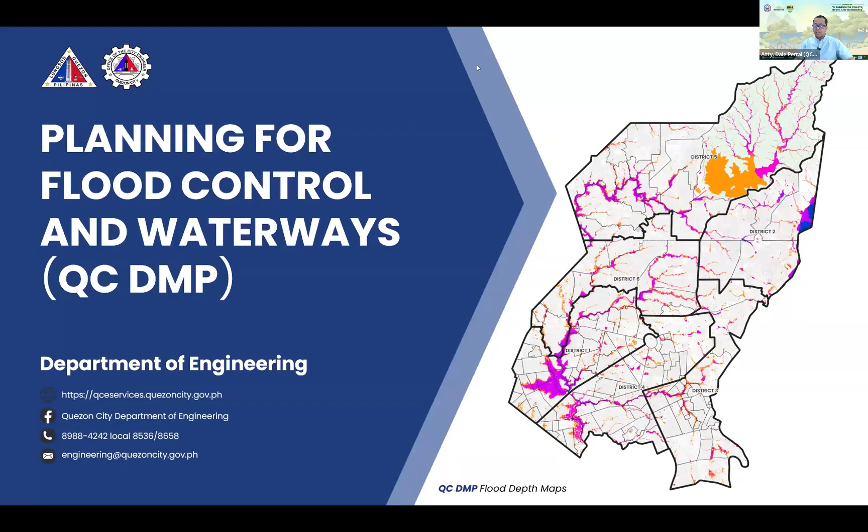So I'll be discussing planning for flood control and waterways, the Quezon City Drainage Master Plan. So the highlights of the presentation are as follows. Am I clear? Yes, sir.

So the highlights are as follows: the Quezon City Drainage Master Plan, the flood mitigation project, and our accomplishments since 2019.

So the Quezon City Drainage Master Plan has been developed through the joint efforts of several departments of the Quezon City government, not only the Department of Engineering, but also the QCDRRMO, the Disaster Risk Reduction Management Office, and of course, led by the Office of the City Administrator. Aside from the Quezon City government departments and offices, this initiative has been developed through the help of the UP Resilience Institute, or the NOAH Center.

It began in 2021 and was completed in 2023. While it was completed in 2023, this study is continuous, and we are trying to update our data currently.

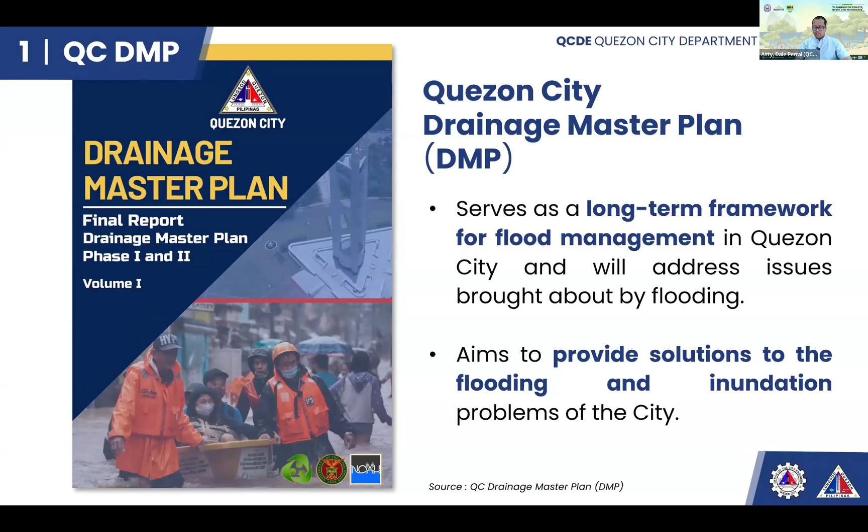So the Quezon City Drainage Master Plan serves as a long-term framework for flood management, and we hope to address the issues brought about by flooding. It's meant to provide solutions to the flooding and inundation problems of the city. Basically, it's not only about infrastructure and engineering; it also includes social preparation, disaster risk reduction management, and other aspects as well.

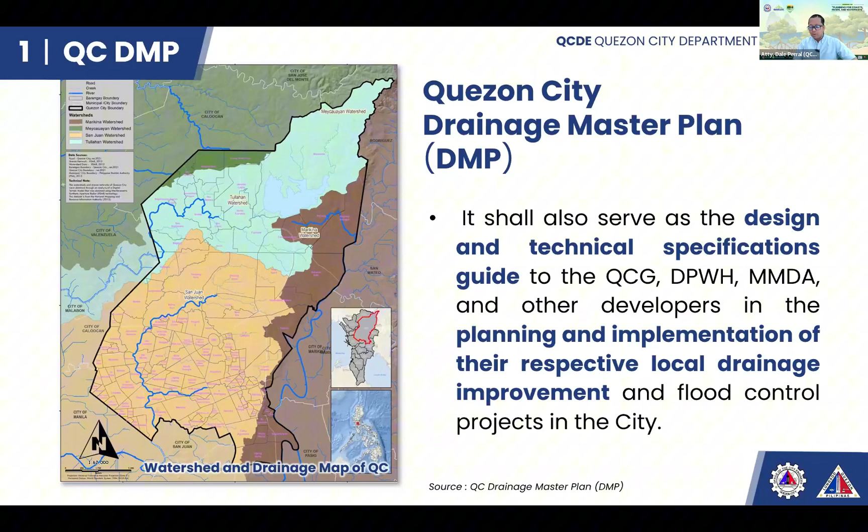So the Quezon City Drainage Master Plan provides design and technical specifications as a guide. It does not really specify or list infrastructure projects, but rather it's a collection of technical data that will aid us in performing our planning and design of the projects. Basically, it is a collective effort on the part of government, UP, and private institutions to gather technical data and all necessary data for the implementation of several projects. Again, it's not a list of infrastructure projects.

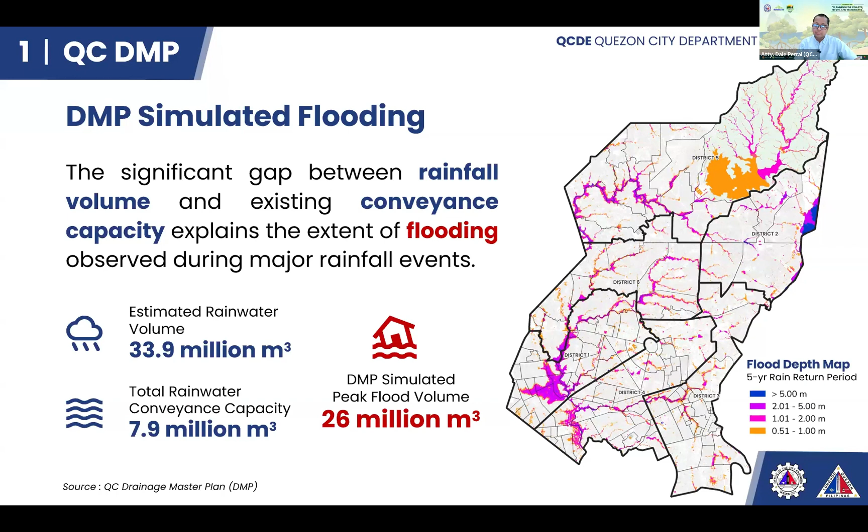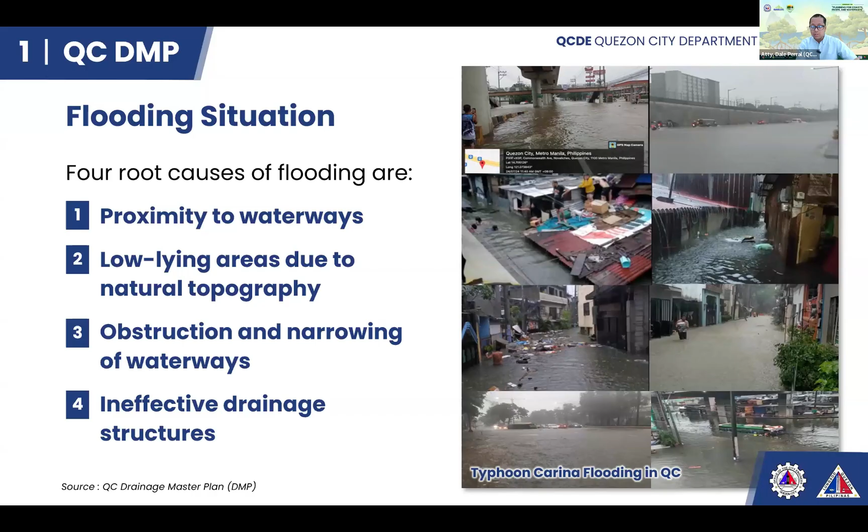So again, it's not only one single root cause based on the drainage master plan. There are several.

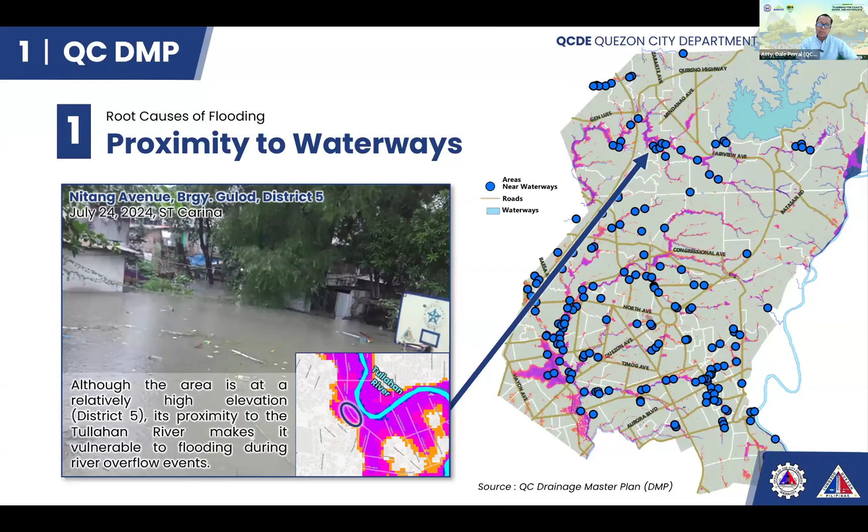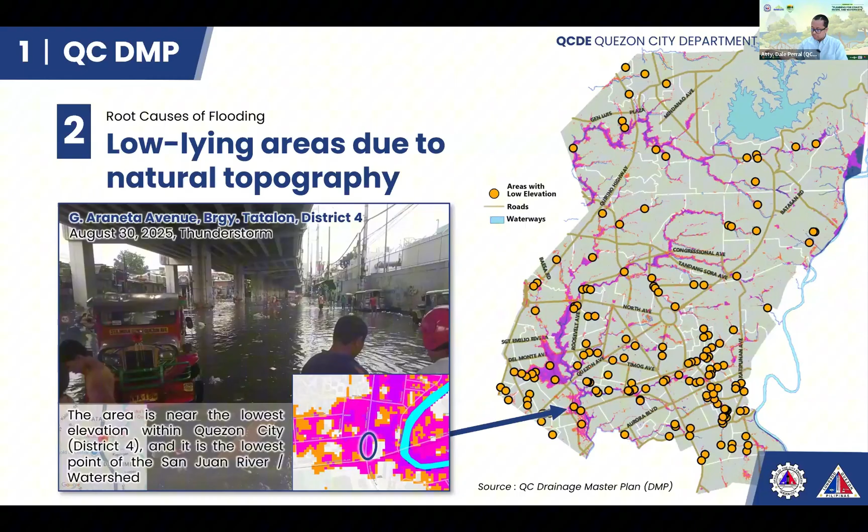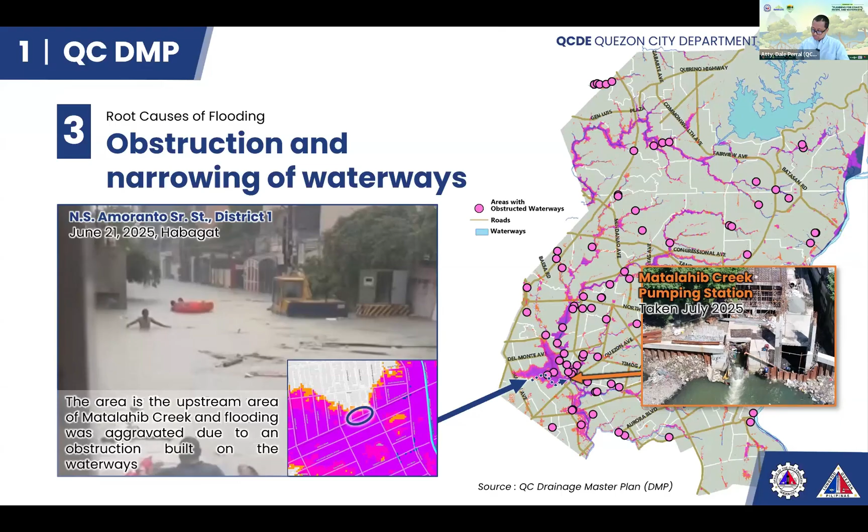So the fourth root cause will be ineffective drainage structures. One example is a private road in a private subdivision, Philam Homes, in District 1, Barangay Philam.

Since we cannot do infrastructure projects inside the subdivision, we studied the drainage system of West Avenue. We found out that the drainage system along West Avenue is situated almost at the elevation of the road, or the curb and gutter. So basically, the elevation of the drainage system of West Avenue, which is supposed to be the outfall of the drainage system of Philam, is actually higher. That's why the runoff from Philam Homes is not able to immediately discharge to the outfall of West Avenue, simply because the elevation of the drainage is higher than the elevation of the road.

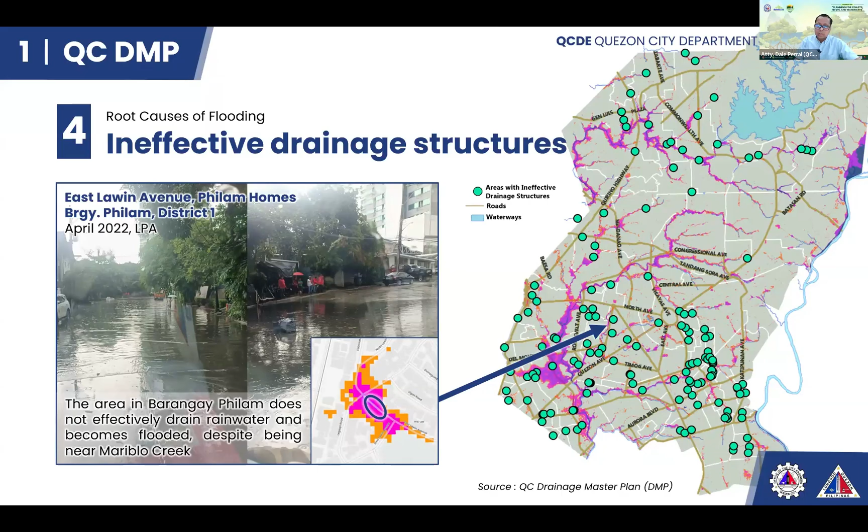So these are the project recommendations under the structural category that we are doing and have done so far. First is drainage system rehabilitation, construction, and upgrading with updated DPWH standards. This picture shows the project site of the West Avenue drainage system.

As you can see, the elevation of the concrete pipe is deep, not the usual drainage depth we observe. The depth of this pipe is around 6 meters, up to I think 10 meters deep. This is one of the reasons.

For me, this is one of the benefits of having the drainage master plan, because we are able to technically decide how this drainage system will be properly designed. After the completion of the project along West Avenue, we are very happy because flooding in Philam Homes was significantly reduced. There are still instances of flooding, but it's not as deep as before we commenced the rehabilitation of the West Avenue drainage system.

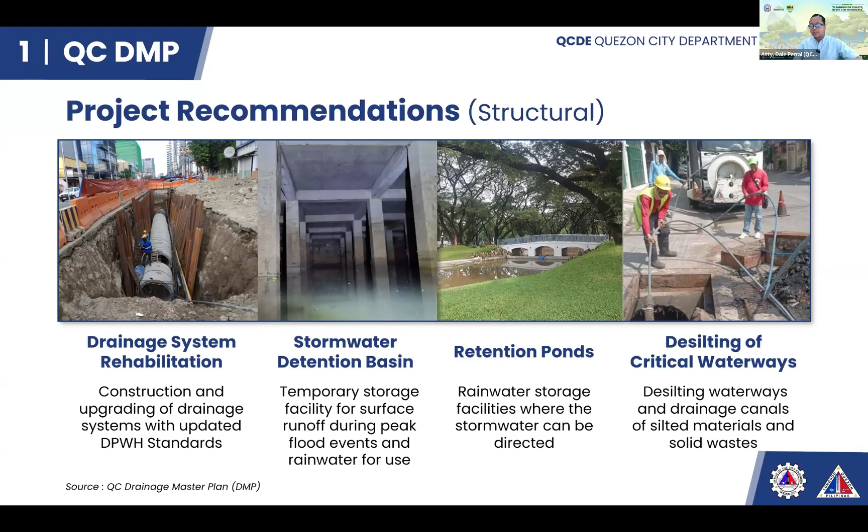Now we move to flood mitigation project planning and design.

So we have one area here, located in District 1, Barangay Santo Domingo. This is Maria Clara Street. The case study of the actual site condition at Maria Clara Street, Barangay Santo Domingo, District 1.

Based on the pictures and as observed, perhaps some of you experienced the flooding in the area. More or less, the flood there is around knee deep, but in some instances it can reach up to more than or at least 2 meters of height. So this area is problematic in terms of flooding, and we know it's a flood-prone area.

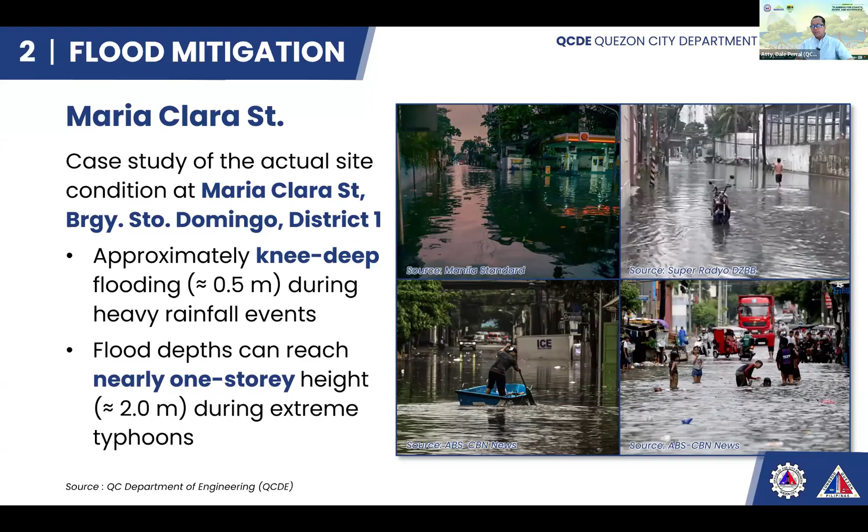If we look at the drainage master plan flood hazard map, the expected flood volume in this area would be around 5 meters deep. The color blue, we just did not include it there, it's more than 5 meters at the top right of your screen. So this is the magnitude or level of difficulty of the flood problem that we're dealing with in this area.

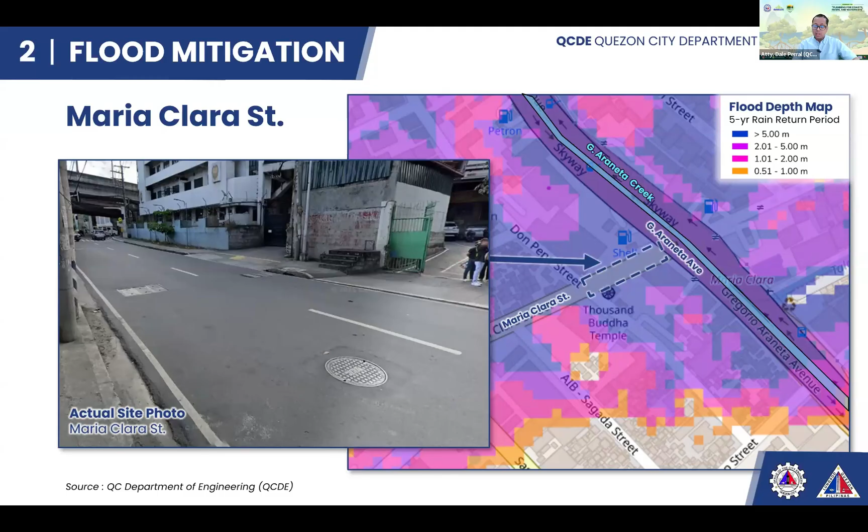But nonetheless, we are trying our best to do scientific research and engineering solutions in order to mitigate the same. So what is our proposed solution?

Having the primary considerations of the area, these are some of the things that we need to study. First is the flood volume, second is the road condition, third is the drainage alignment, and of course, what I think is the most important of all, the socio-legal constraints.

Why are we highlighting the road itself? We are highlighting the road simply because we want to do our solutions the soonest possible time, the fastest. Legally speaking, the fastest way to construct a space for these flood waters will be government properties. And obviously, a government property on a flood-prone area primarily will be roads, national roads, city roads, barangay roads. As long as it is public, we can work on it as soon as possible.

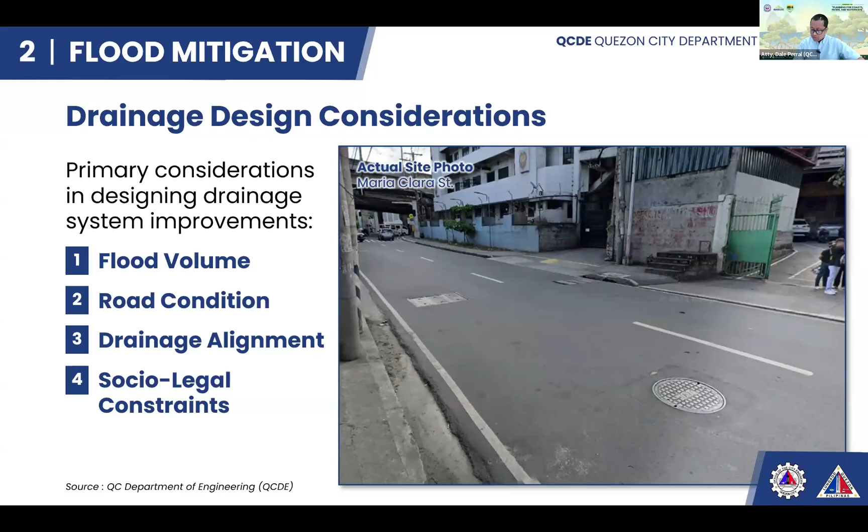So these are the data for the specific area. We have actual flooding of around 2 meters deep, estimated volume of 1,536 cubic meters. This flood volume is being recorded by the team regularly. However, based on the drainage master plan simulated flooding, the expected flood volume would reach around 5 meters, with an estimated flood volume of 3,840 cubic meters. So basically, these are our problems.

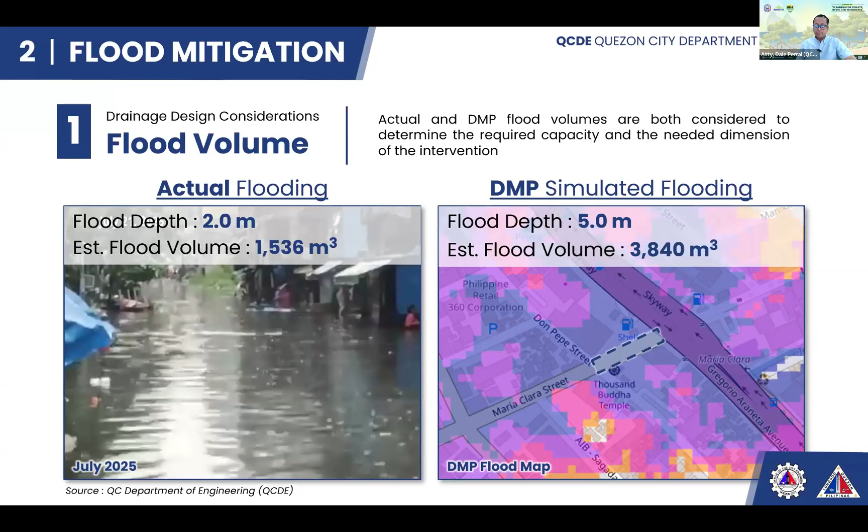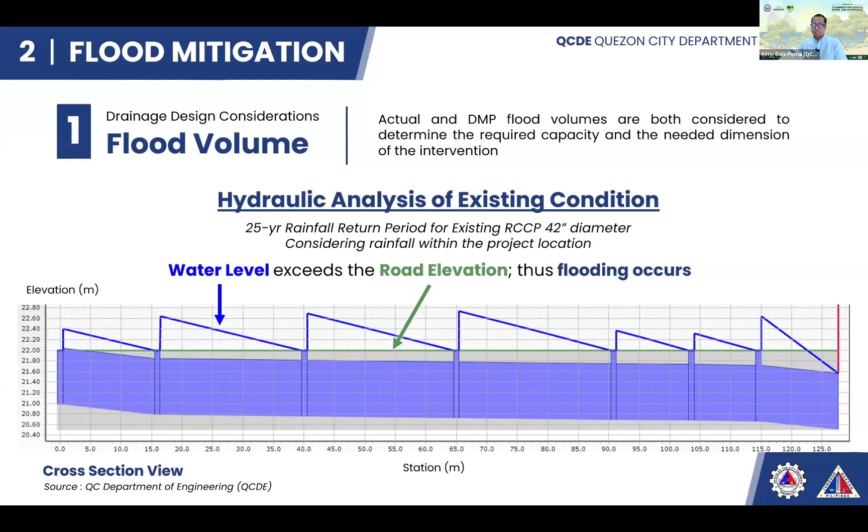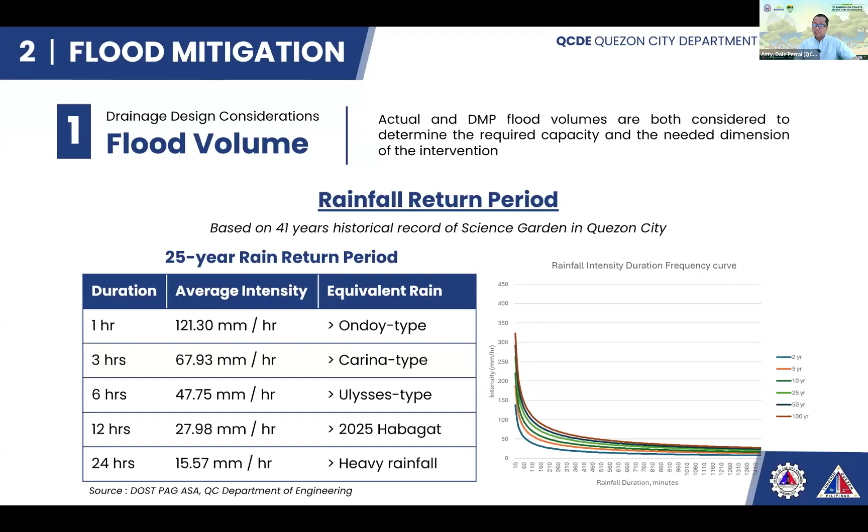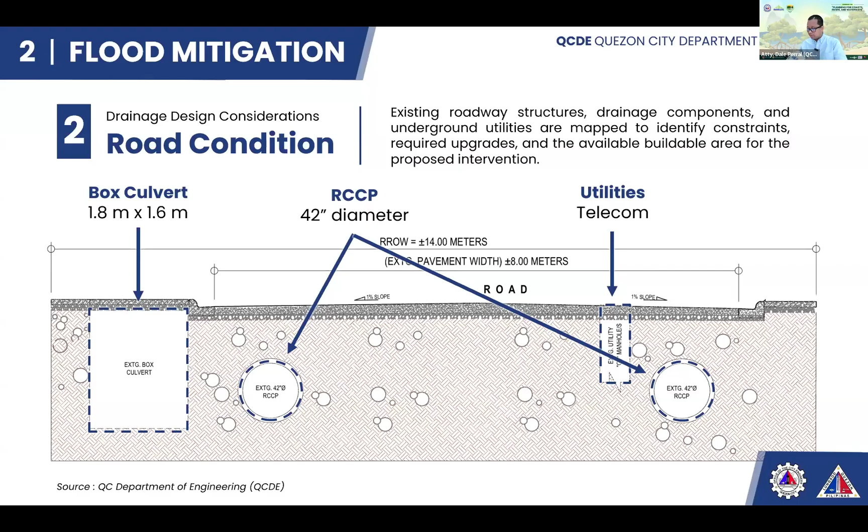Now, what we observe is that there is a space between the utility facilities, the pipes, and the concrete pipes. So we plan to work on that available space in order for it to be used as detention for the flood water.

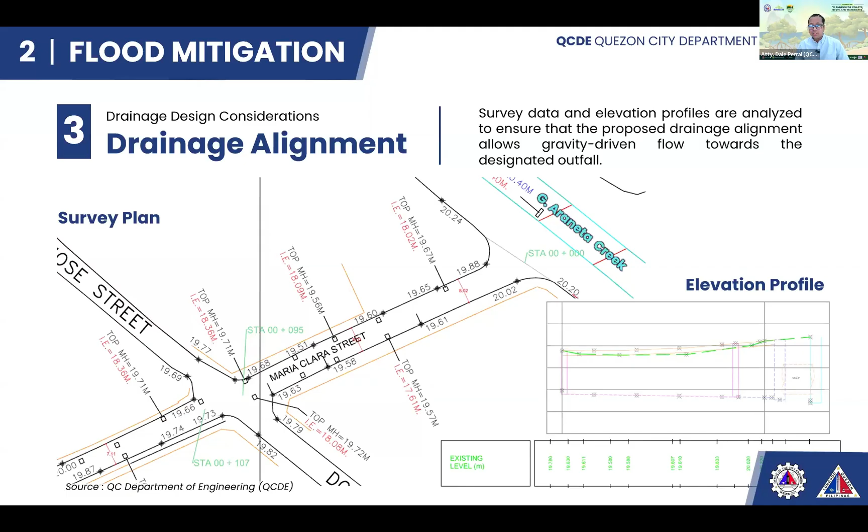After doing the investigation, or rather parallel to the investigation, the site investigation, we surveyed the road and found out that at Station 0 there is natural ponding of water because the middle of the road has the lowest elevation. So we consider this, and we will be rectifying the elevation of the road in order to have an efficient flow of the drainage water.

As we move on the engineering study of the solution, we also conducted social and legal public information drives and consultation with the barangay and residents last November 29, 2025. This will ensure that all aspects of the project are well explained to the public, and in case of issues or questions—since residents often include engineers and technical people in the community—we find it important to always explain our projects, so they can contribute and be aware of any precautionary measures during implementation.

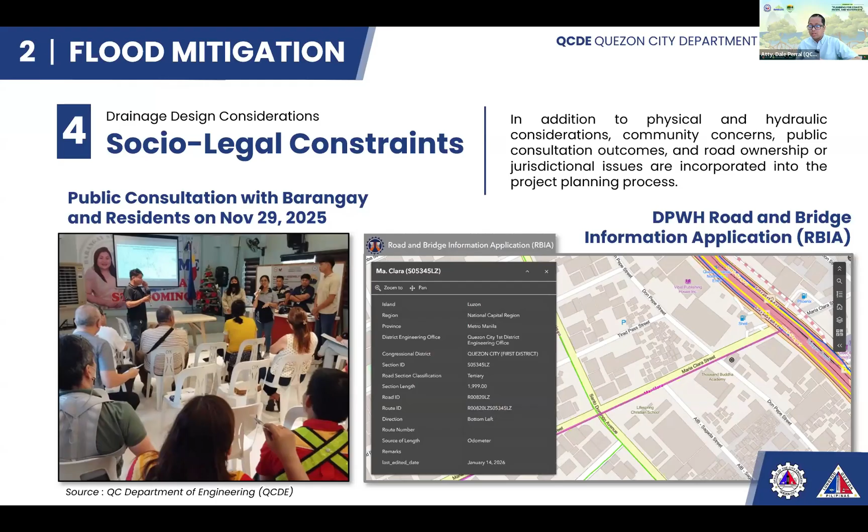Does it absolutely solve the problem? No, it will not absolutely solve the problem, but it will cover up to more than 60% of the actual flood volume in the area, and around 25% of the estimated drainage master plan flood volume. This means it will allow citizens to prepare if there is imminent flooding or heavy rainfall, an Ondoy-type rain incident. The community will now have more capacity to prepare longer, and more time to evacuate, perhaps.

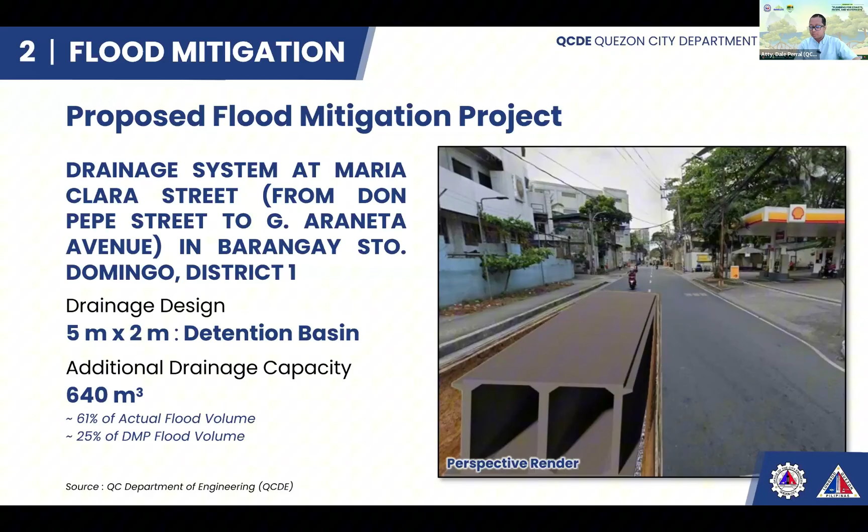Going back, this is just one example of what we are doing—we proposed a box culvert. If you observe along G. Araneta Avenue, the pipe laying of HDPE pipe has already been completed by the Department of Public Works and Highways. Actually, that project came from us. It was a product of hydraulic simulation done by the Quezon City government, and we gave it to them.

We are giving studies to them for proposed projects, and we're very happy they were able to pick up and implement one of the projects we recommended along Araneta Avenue. I think they will continue, based on our recommendations, to extend further the HDPE pipe laying on the road or area.

Here is just an illustration of what we will be doing, and we hope to finish it soon. There will be closure of roads so we can work faster, and at the same time we are directly coordinating with the communities and the barangay to implement it efficiently and speedily.

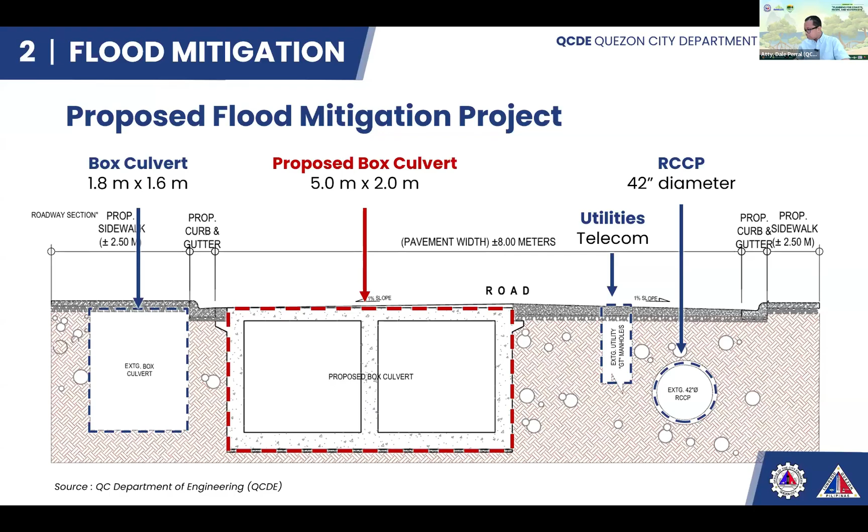Hopefully after we finish the project, this is the result we're hoping for: the proposed drainage system is sufficient to contain rainfall intensities greater than the 25-year rainfall return period, equivalent to 12 hours of red rainfall. Meaning, if there is a similar rain incident for a period of 12 hours with less than 30 millimeters of rain, we're confident that area will not be flooded anymore.

As we can see, the way we plan and think of projects is not simple—we consider a lot of things. We study many parameters before we conclude or propose a project, because we are very mindful that every peso we use came from the Quezon City citizens, and we ensure everybody that we are using all these resources to the best of our abilities.

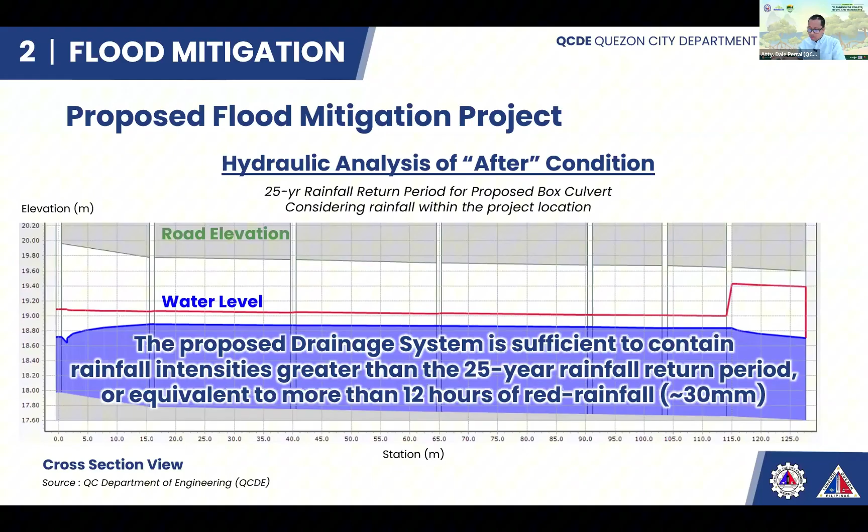So now we go to the Drainage Master Plan accomplishments from 2023 up to present.

So far, we've completed these activities. For drainage capacity, we've improved it by up to 30.6 thousand cubic meters. In addition, we restored almost 100,000 cubic meters of existing drainage capacity through declogging of drainage systems and dredging of waterways. So in total, so far, we are at almost 125,000 cubic meters of additional drainage capacity.

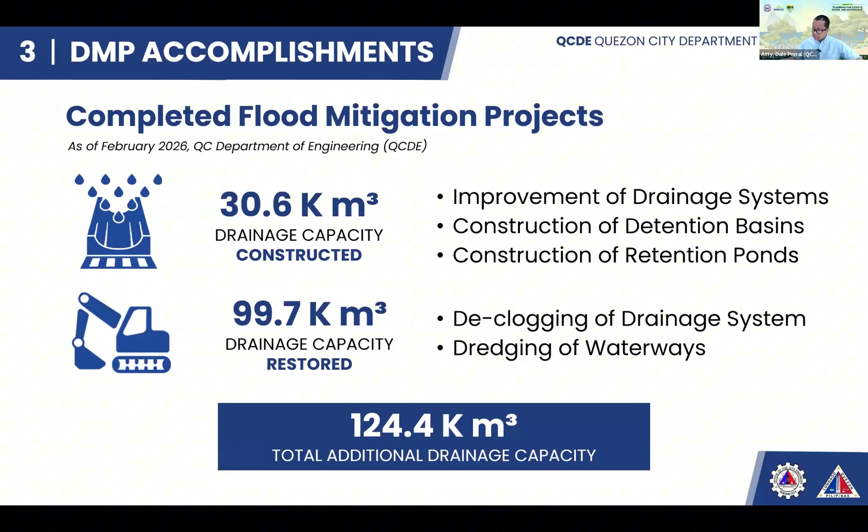So for the constructed drainage capacities, these are some of the projects we already have completed. We did some improvement of the drainage systems. Again, for West Avenue, we also have this Valiant Street drainage and detention basin.

Actually the Valiant Street drainage and detention basin solved the flooding in Commonwealth Avenue, for those who reside or know the Commonwealth Avenue Fairview area in front of Pearl Drive, you know it to be flood prone. In fact, one of the pictures taken there showed a flood level at the middle of the elevation of a bus. So it means the flood reached somehow at least 2 meters high.

So what we did was construct a detention basin, drainage improvement, and a water tank in Valiant Street just across Pearl Drive. I think the solution is doing well so far. Last year, even during the heaviest of rains, while we still experienced flooding in other areas, we did not experience flooding in this particular area in Commonwealth Avenue in front of Pearl Drive. Hopefully the solution will be absolute in this area, but we're still observing. It depends upon the amount of rainfall and runoff we will be experiencing.

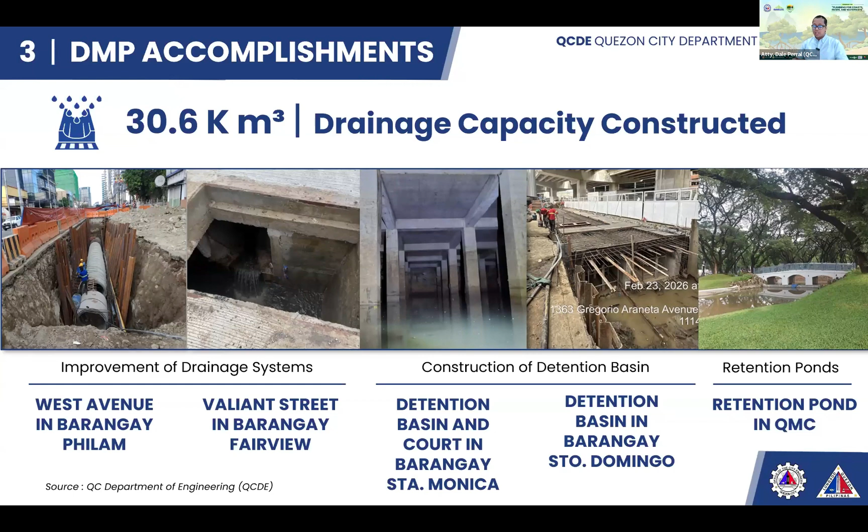So this is the situation in West Avenue, as somehow I've explained earlier. Again, when we do projects, we don't just list projects. We actually study first carefully what is the existing condition, what are the existing circumstances, and what will be the proposed solution. In this case, there were actual complaints of flooding in Barangay Philam, and we did not jump into excavation right away.

So from the inner roads, drainage water or runoff will go to the main roads, and in this case, supposed to be the drainage water of Philam should go to West Avenue. Unfortunately it is not really working. Why? Because based on the investigation we did, the elevation of the West Avenue drainage system is actually higher than the elevation of the Philam Road. That's why there is flooding in the area.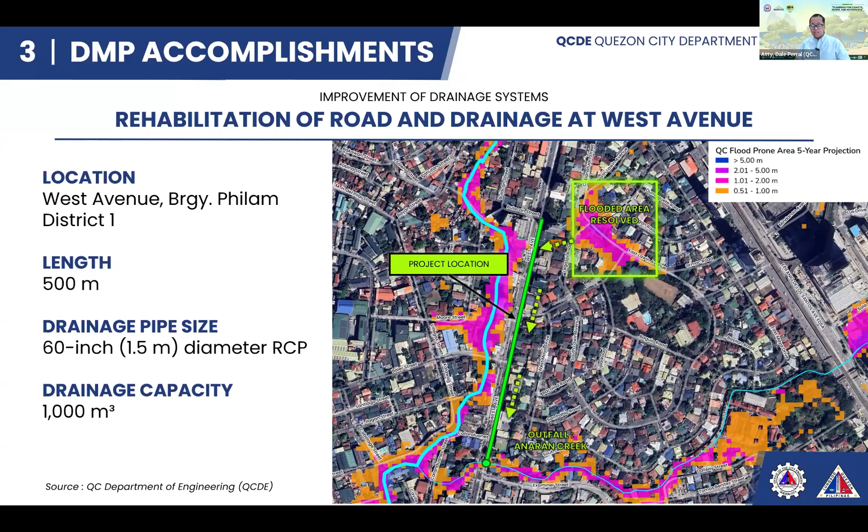So here we can see that the drainage pipe size is 60 inches diameter reinforced concrete pipe with a drainage capacity of 1,000 cubic meters. So what is our solution? Since we cannot excavate the Philam subdivision because it's privately owned and the roads there are private as well, what we did is prepare West Avenue to be able to accept the drainage water coming from Philam.

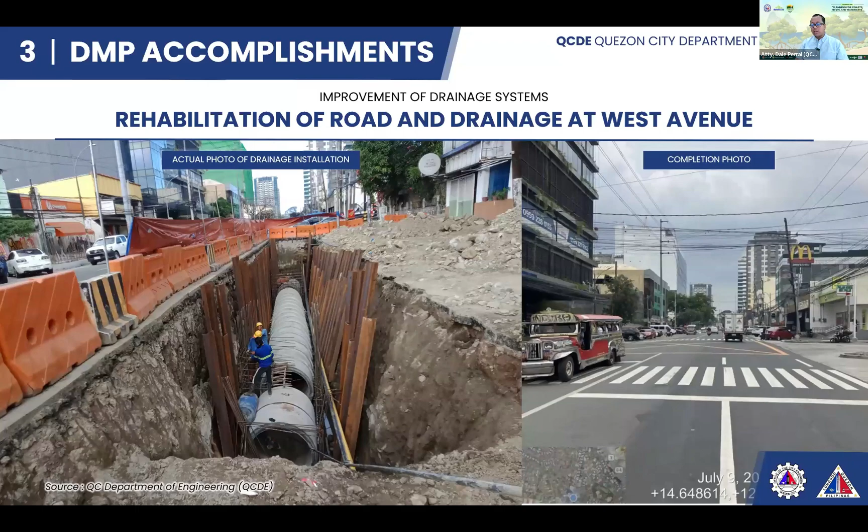So we somehow utilized the concept of sewer line design, whereby the elevation of the line depends upon the elevation of the source and the elevation of the outfall. Here we can see that it runs contrary to the usual drainage design, whereby the elevation of the pipe is almost on the same level as the elevation of the road or the curb and gutter. Here, the elevation of the drainage system is so much deeper than the elevation of the road, reaching up to more than 6 meters deep.

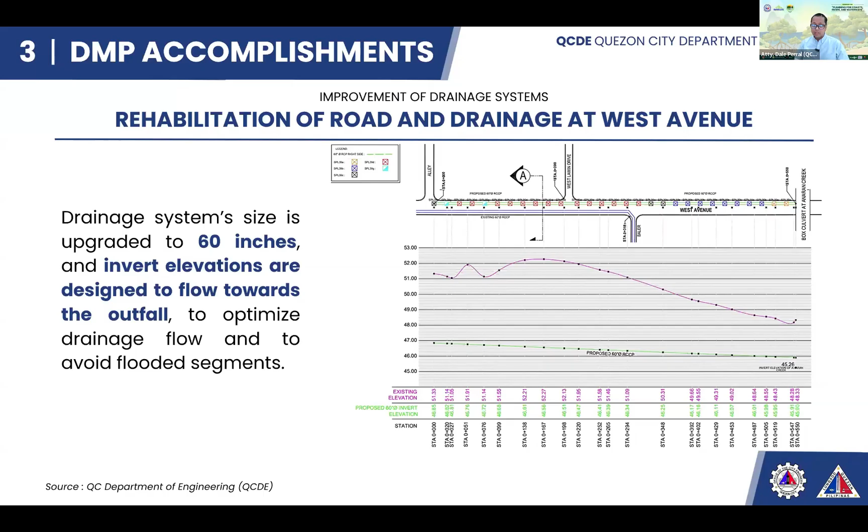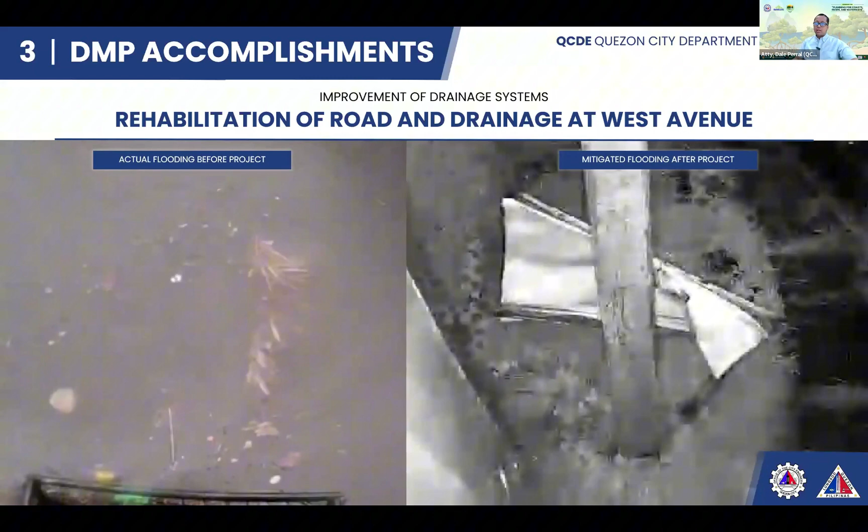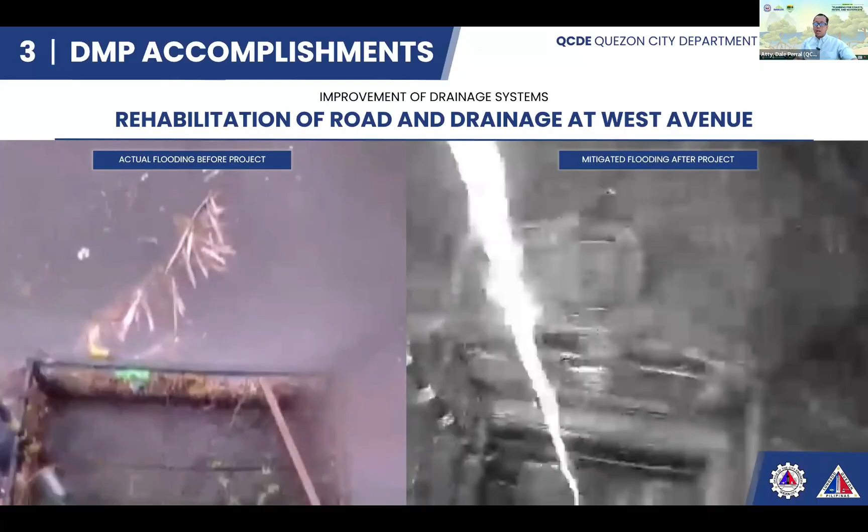So as you can see, there are two videos. On the left was the actual flooding before the project, and on the right is the actual video after we did the project. Before there was flooding, and after, even during heavy rainfalls, there are no more floodings. It's mitigated.

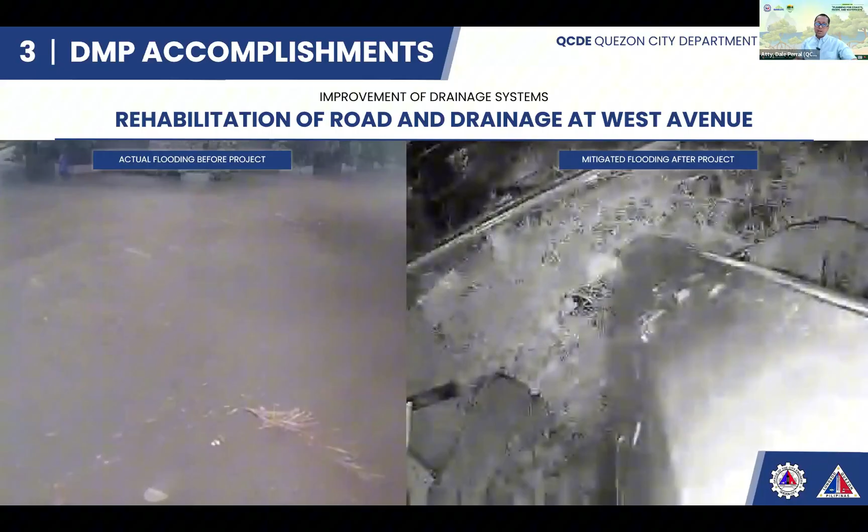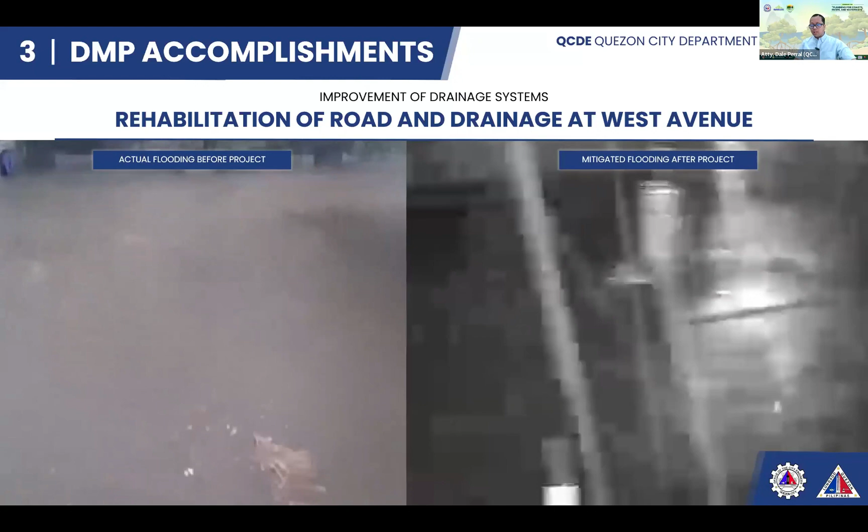As we can observe, the flow of water on the left is very slow. Why? Because the drainage system outfall that should accommodate this flood water is inefficient. On the right, the flow of water is fast because we changed the elevation of the drainage system along West Avenue. Hence, it was able to accommodate the runoff and drainage water from the subdivision.

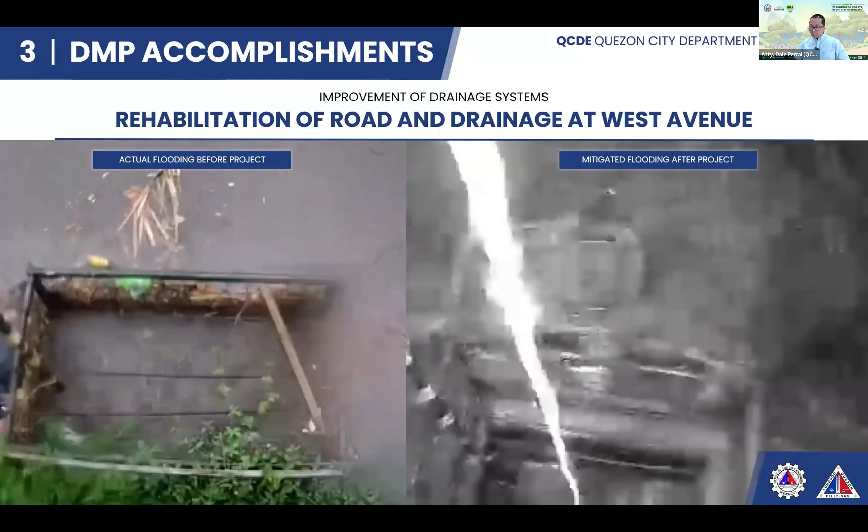So another example. This one is the Pearl Drive incident that I explained earlier.

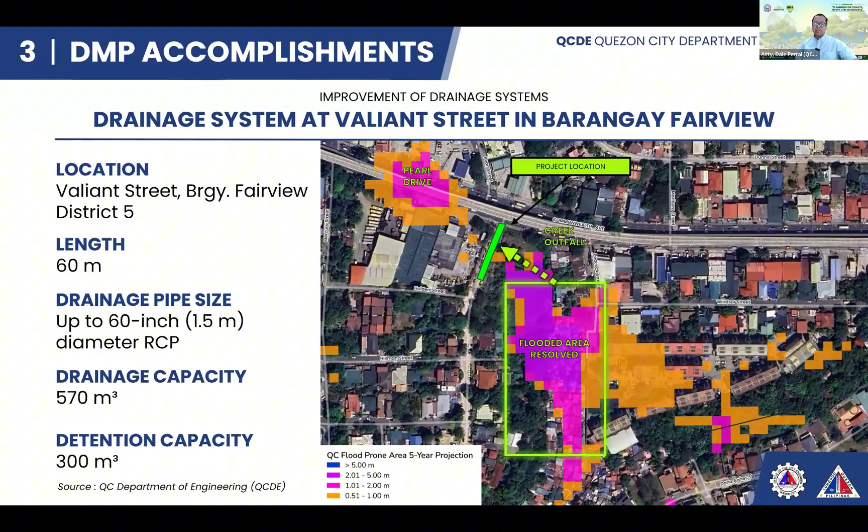As we can see here, there is a flooded area in Pearl Drive on the top left of the picture, and that's the problem, and the outfall is on the green line.

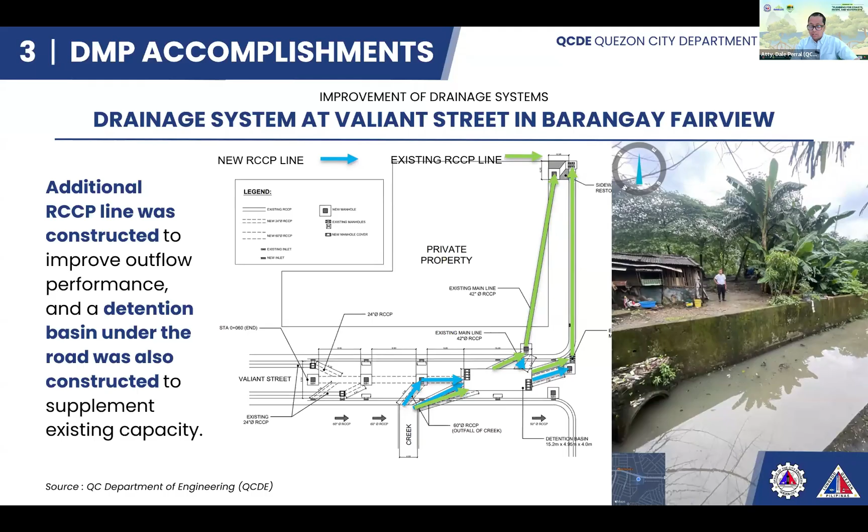So what we did is we constructed a water tank that would increase the capacity of this creek. Aside from the capacity of the creek, the capacity of the detention basin or water tank augmented the capacity of the water systems in order to accommodate the imminent flooding in Pearl Drive.

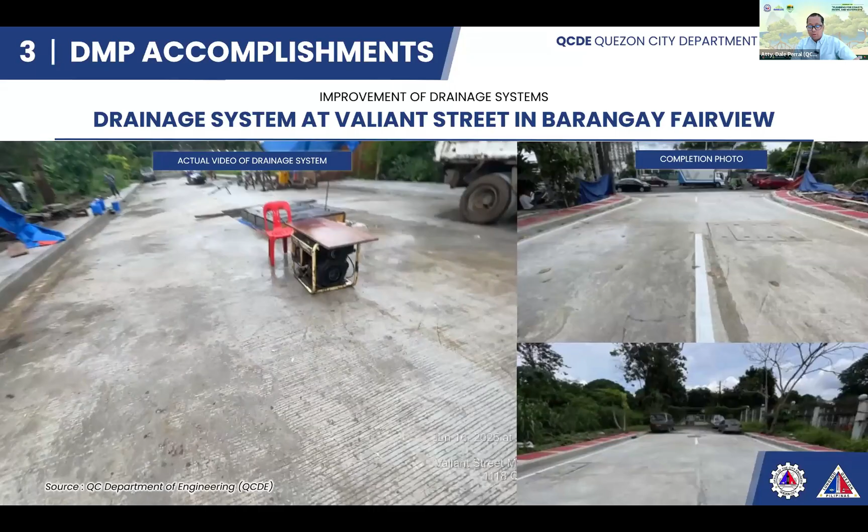So this is the current situation now. Before, there is no collecting tank, as you can see on the left. So we constructed a water collecting tank for the water from Pearl Drive or the adjacent creek, so that it can have additional volume. Hence, the water will not go on top of the road.

So all of this is run by gravity. As you can see, there are no pumps installed. Why? Because we do not really recommend installation of pumps when talking about flood mitigation in Quezon City. We are not a coastal area, and what we need is additional spaces for detention, not really to control the flow of water. So here, it naturally flows by virtue of gravity.

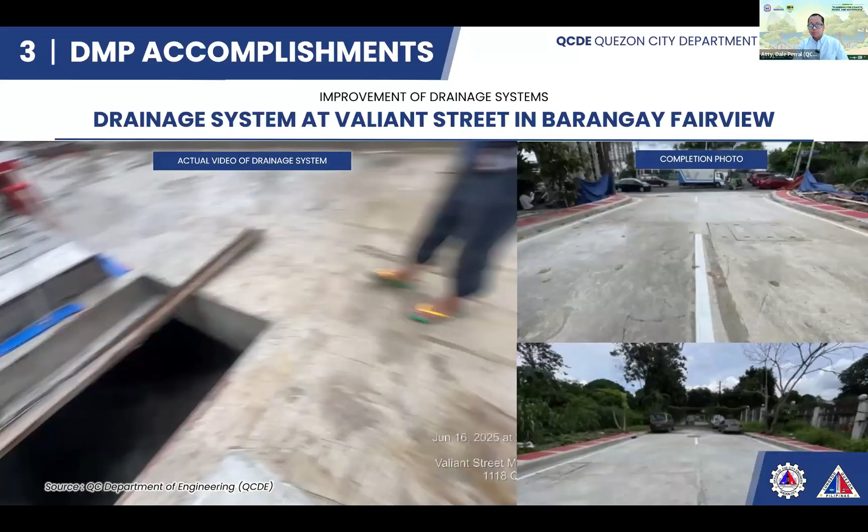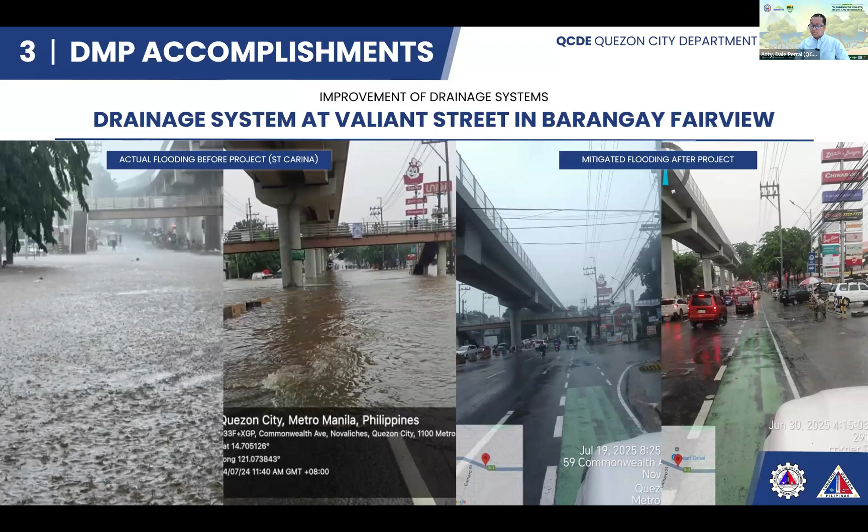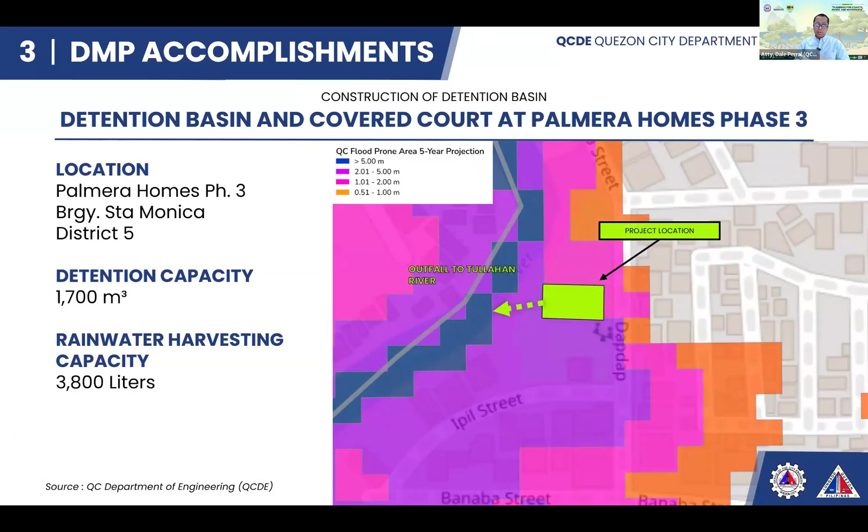So the next project is a detention basin underneath a basketball court. There are several locations, but I will just mention one, I think it's in Palmera Homes, still in District 5. The detention capacity is 1,700 cubic meters with additional rainwater harvesting capacity of 3,800 liters.

We always try to optimize government resources, not only in terms of funds, but also lands, utilization of government lands. As we can see, the value of land in Quezon City is extremely high, that's why we are trying to optimize the utilization of such. In this instance, we are able to hit two birds with one stone: we construct a facility for the community, for sports activities and other events, but at the same time, we're trying to mitigate the flooding in the area.

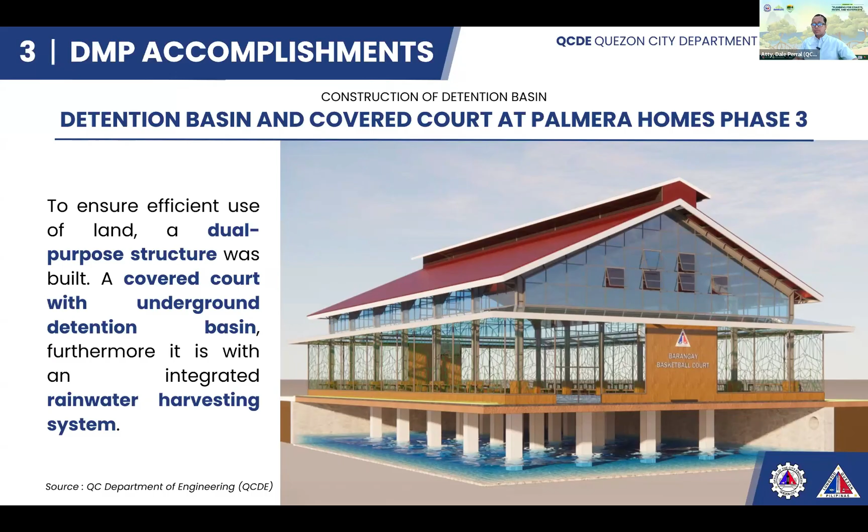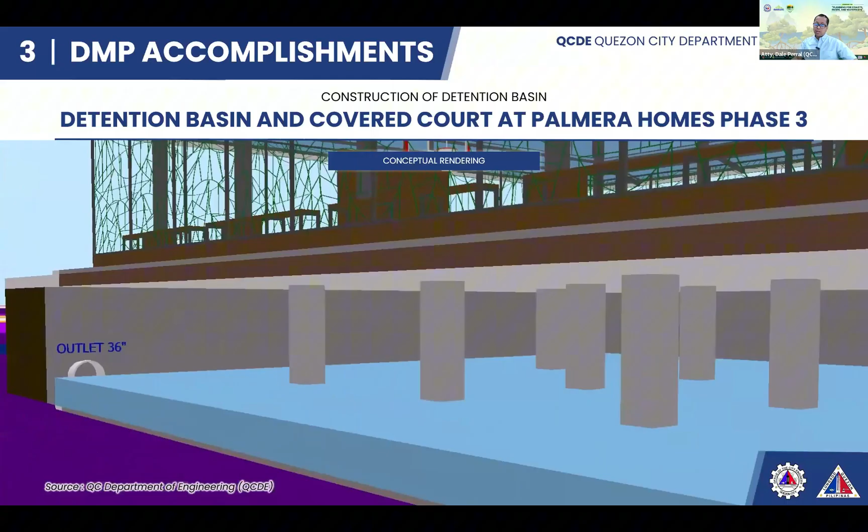So this is just a representation of the concept of the project. The project is located on a flood-prone area. As you can see, the hatched violet and purple area means that the area is flood prone.

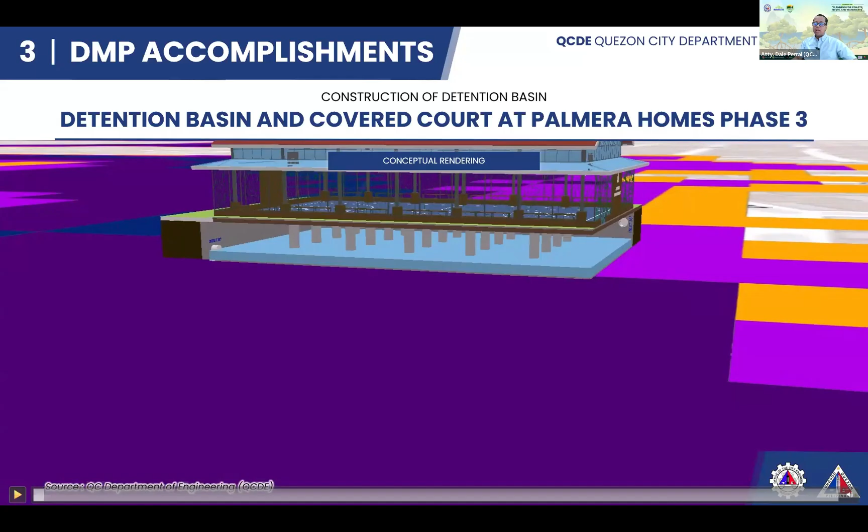And it will naturally come out when the level of Tullahan River will be normal again. Again, as much as possible, we work on non-pump systems. We just use gravity so that it will be minimal in terms of operations and maintenance as well.

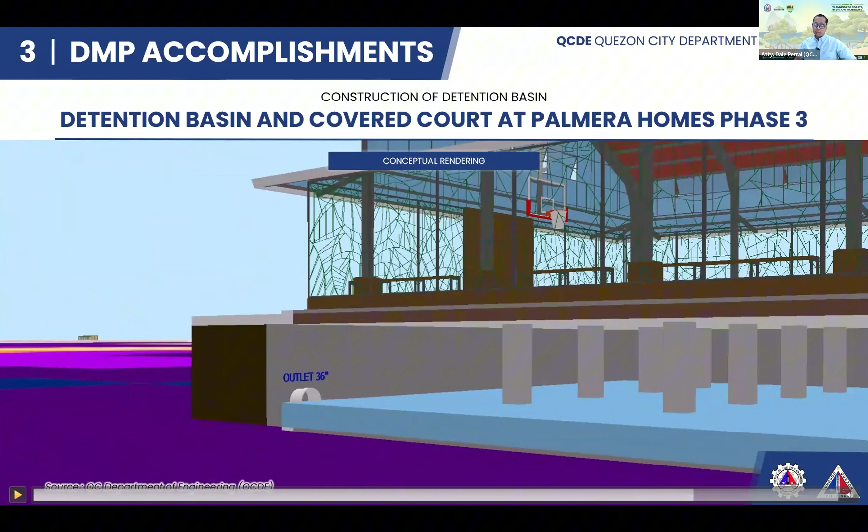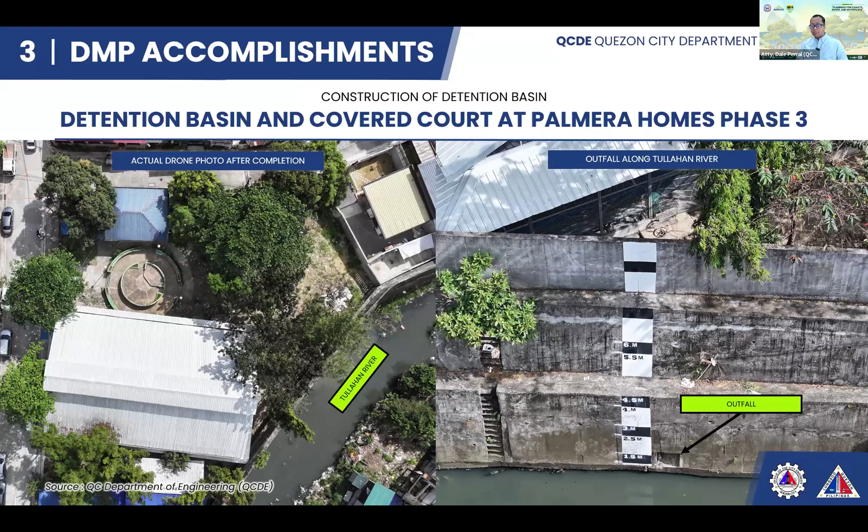We also did some markings of the water level so that when we operate the gates, it will depend upon the elevation or water level. So here is it now.

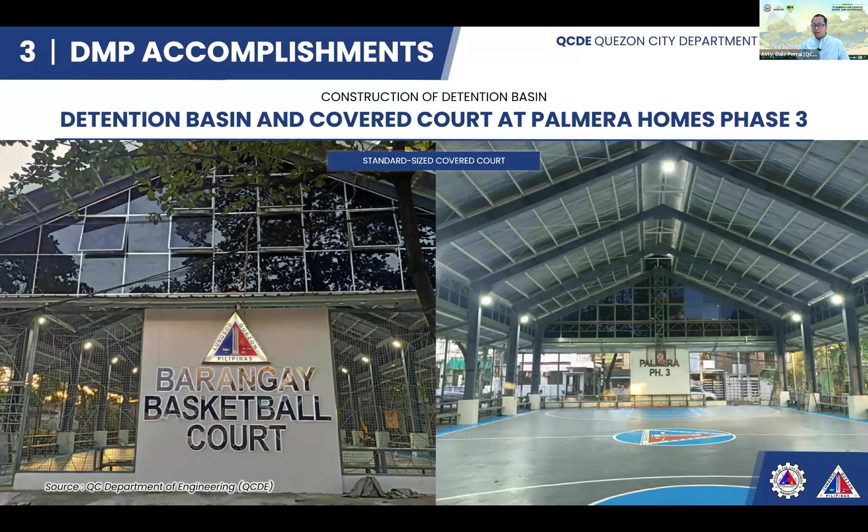Mayor Joy already cut the ribbon for this project, and the community is already enjoying the facility, the basketball court, and the multipurpose hall. And at the same time, somehow even before construction, even during construction, before the completion of the project, the detention basin already worked, and based on the feedback of the neighborhood, they're able to observe that somehow the flooding in the area has been mitigated.

Again, green engineering, green infrastructure will always be a consideration for all of our projects. Next.

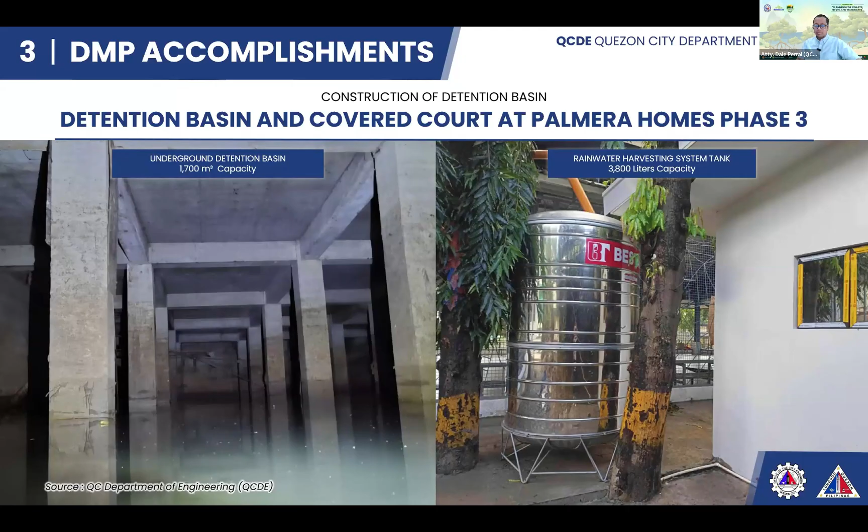Another project will be the detention basin in G. Araneta Avenue in Barangay Santo Domingo. Again, I've explained it earlier already. It's a detention basin with a cross dimension of 5 meters by 2 meters and with a detention capacity of 2,500 cubic meters.

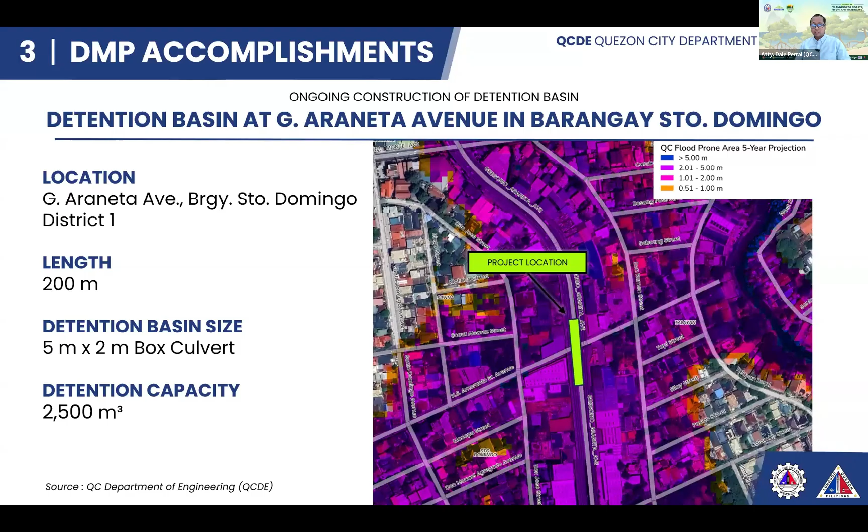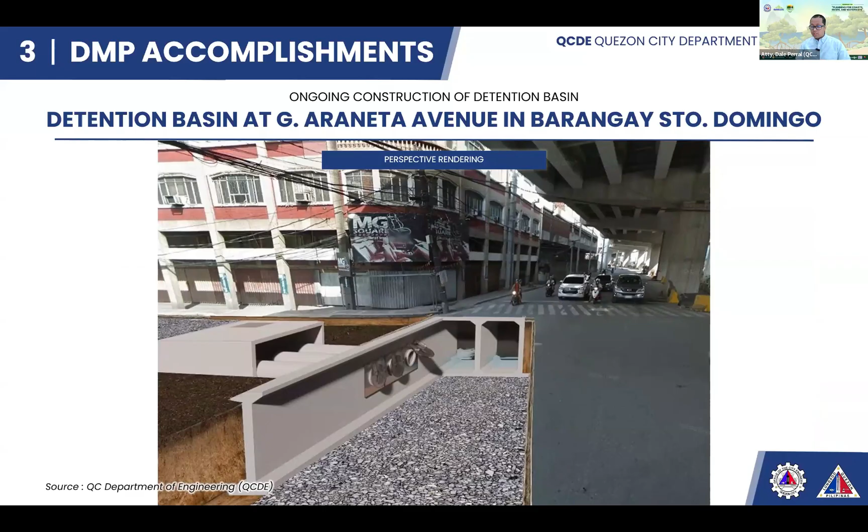So this is the conceptual plan of the design. Basically, we'll just store water, and we will be constructing flap gates in order to avoid backflow, and hopefully this capacity of the detention basin will significantly mitigate the flooding in the area.

So here's it now. We're doing our full swing of construction in order to beat the rain season deadline. I think we are on track, and we are closely coordinating as well with the San Miguel Corporation, who owns the Skyway.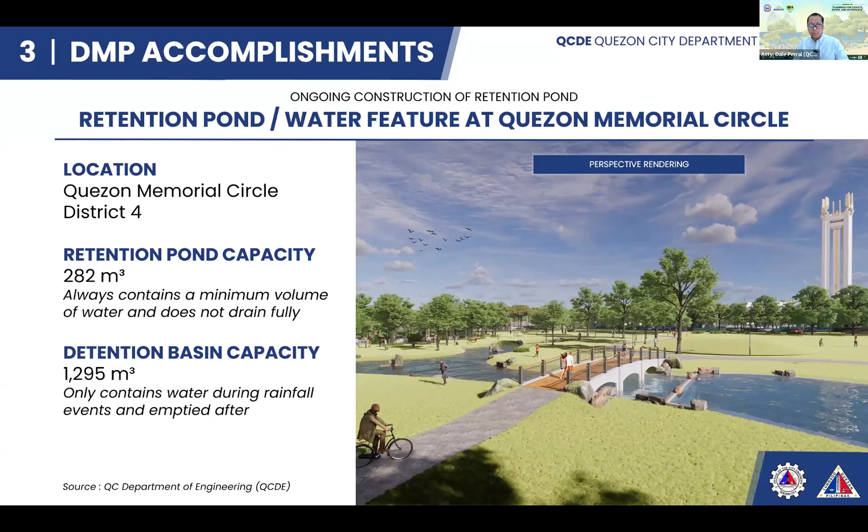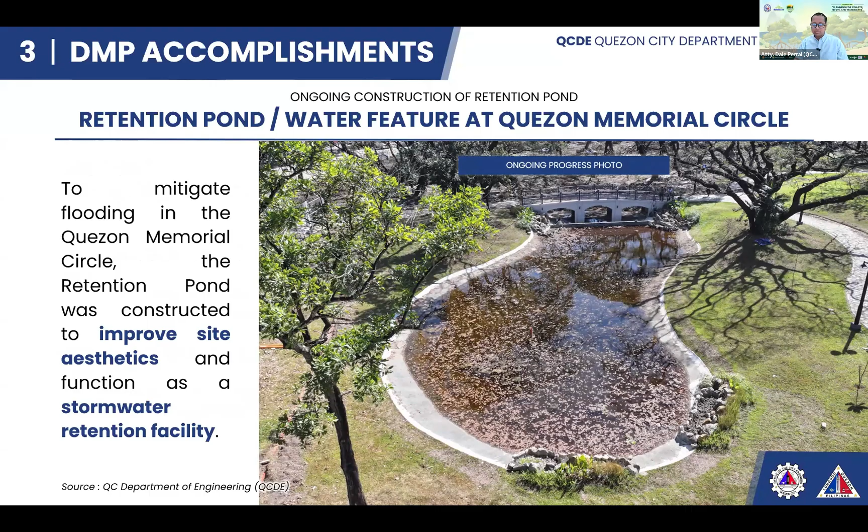So here is the progress photo. We're on our completion stage already. And basically, we converted QMC from its original state of being a concrete park now to a green and open park. So this is just a drone shot of the project.

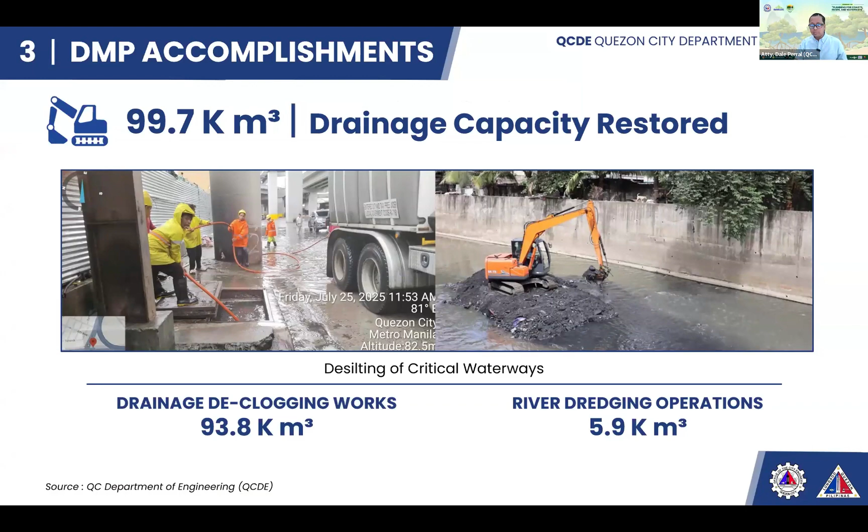So other efforts as well include maintenance works, the drainage and declogging works, and river dredging. For our regular maintenance works, so far we have declogged almost 94,000 cubic meters, which is equivalent to almost 180 kilometers of road.

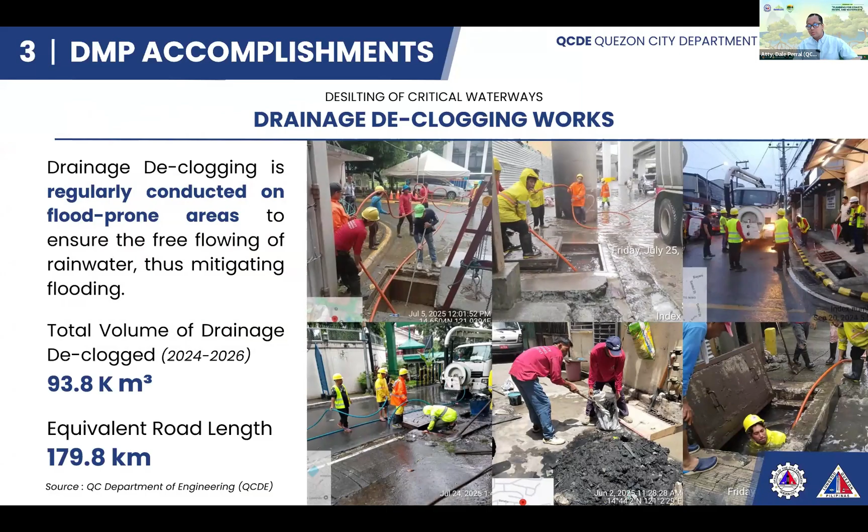So here we are using equipment such as a sewer jet. We have several of those that are regularly working to ensure that the drainage systems are properly maintained. But again, it's not only lack of maintenance that causes flooding, it's primarily because of the amount of volume that we are dealing with and the capacity so far of the detentions that we have.

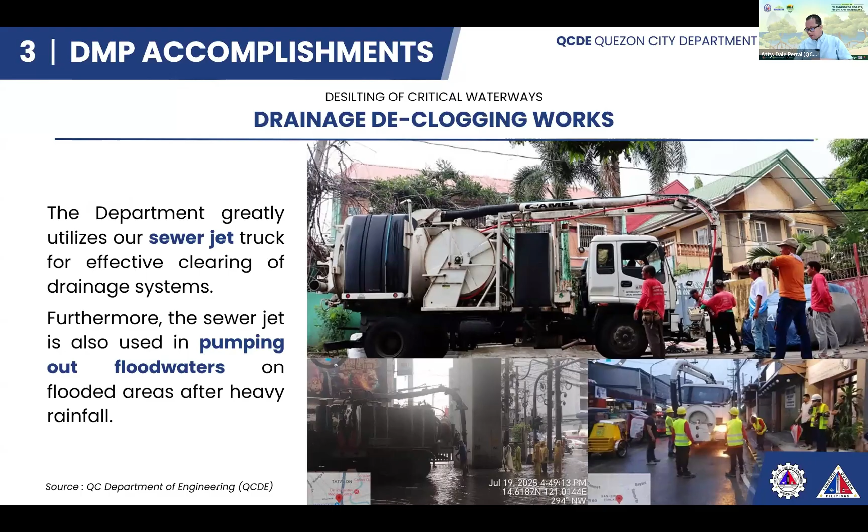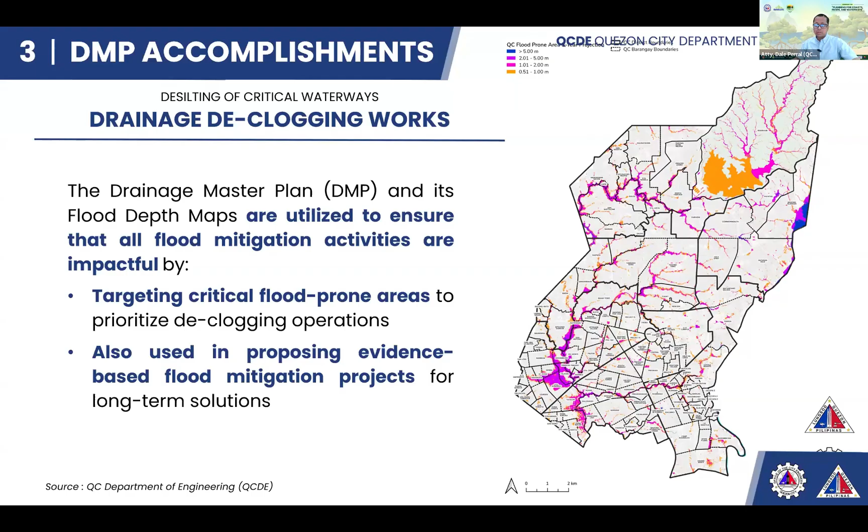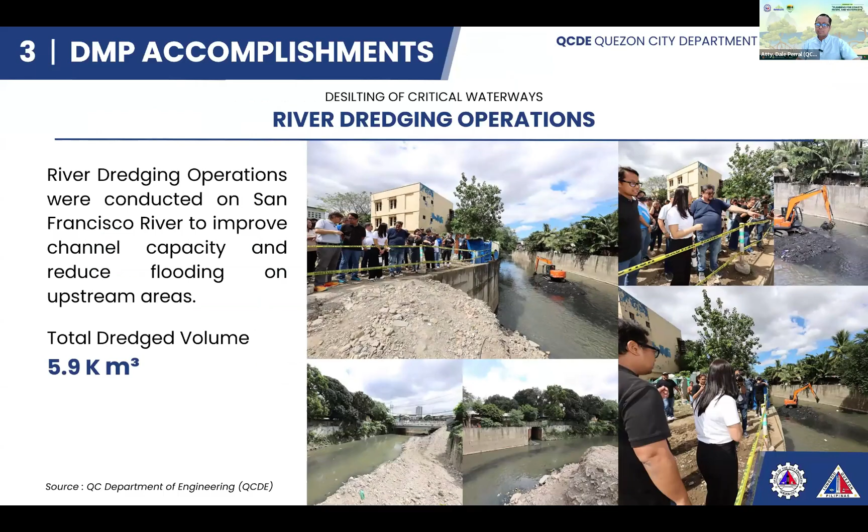Again, it's not only in project management that we are using the drainage master plan, we're also using it on our day-to-day operations for maintenance works and asset management works. We actually initiated the river dredging even before San Miguel Corporation did it, and MMDA, we already commenced the same along San Francisco River.

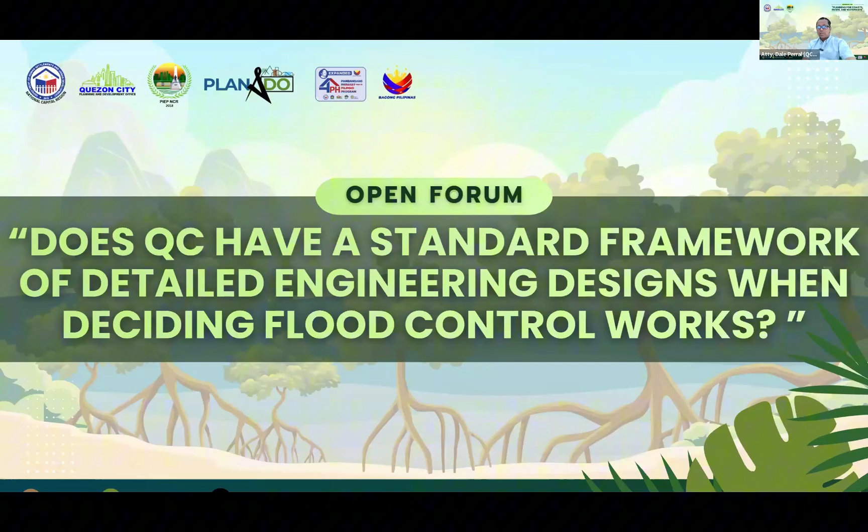I will explain this not only for flood control or flood mitigation projects. The Quezon City government has institutionalized the determination of infrastructure projects since the start of Mayor Joy's term, and because of that, we were able to formulate the infrastructure committee, which is chaired by the city administrator and me.

Before any proposal reaches the infrastructure committee, it comes from a source. The sources are several: it may be a barangay official, a homeowners association, any resident, or a specific complaint. Then it gets elevated to the action officer, who serves as a little mayor of the district. They consolidate and prioritize it, then elevate it again to the departments.

So the departments, the end users, including Prof. Jed, the city architect department, the parks development department, and even the climate change department, will all work on it and prioritize the same. Then it gets deliberated in the infrastructure committee before being presented to the mayor for approval. So what I explained applies to all infrastructure projects.

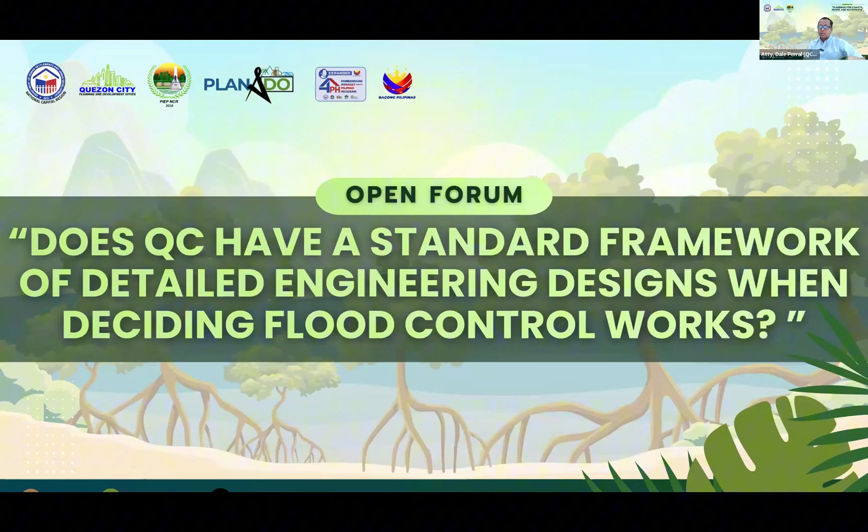Now, when it comes to flood mitigation and flood control, we are a bit more careful. Unlike DPWH which already has a list of projects, for flood control, aside from the process I explained earlier, we also look at another platform, which is the drainage master plan. So aside from that level of the process, when it comes to flood control, there's an additional framework or study we use, the drainage master plan, and our partner there is the UP Resilience Institute. So that's how complex our process is.

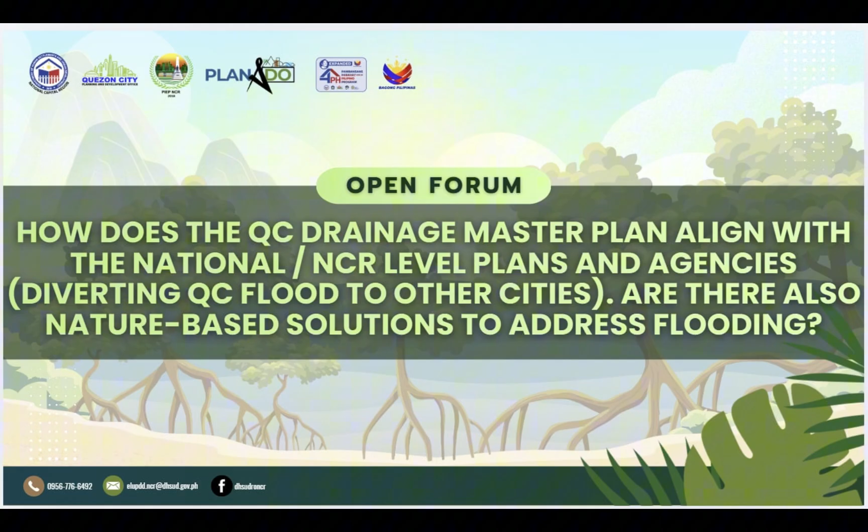Marion, actually this is our problem. So the first part of your question is, how does the QC Drainage Master Plan align with the national one?